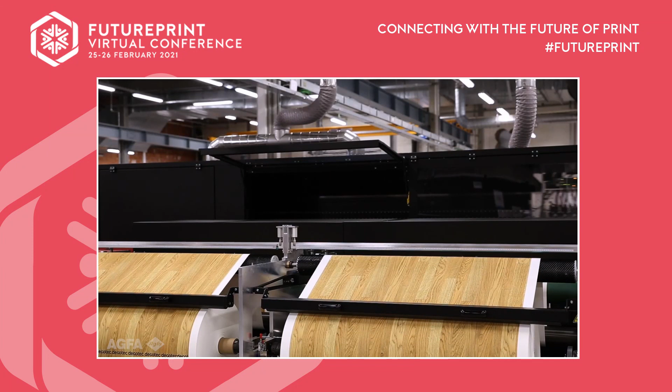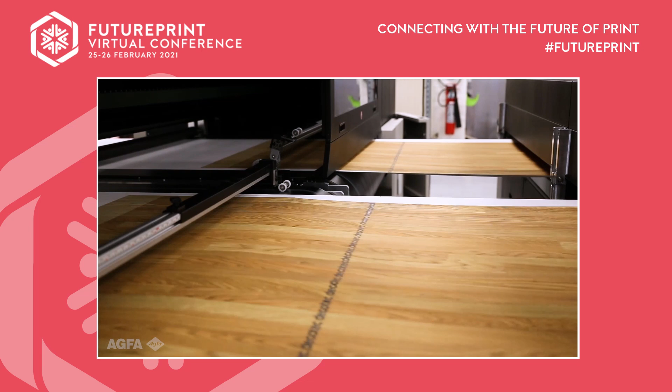Gravure printing has been the standard printing technology with proven quality for decades. This technology was developed to print high to very high run lengths. It uses engraved cylinders as print masters, which are specific to each design. Its color inks are formulated in-house in view of specific designs. It takes time to reach the exact same color each time, and the storage of the cylinders takes up a lot of space. Inkjet printing starts directly from the design file and does not need a print master. It also uses a fixed set of process colors. The design is printed by jetting the ink droplets exactly onto each spot to reach the desired color. This results in many advantages. 1. Inkjet can be used to print very short to long run lengths, and repeat jobs become easy. 2. Inkjet can be used during all stages, from the design over test printing and proofing to real production. 3. The design freedom is huge.

Specials such as company logos, pictures, one-off designs, and much more become easy and economical. Printing of different consecutive designs without stopping, or with a very short changeover time, becomes realistic.

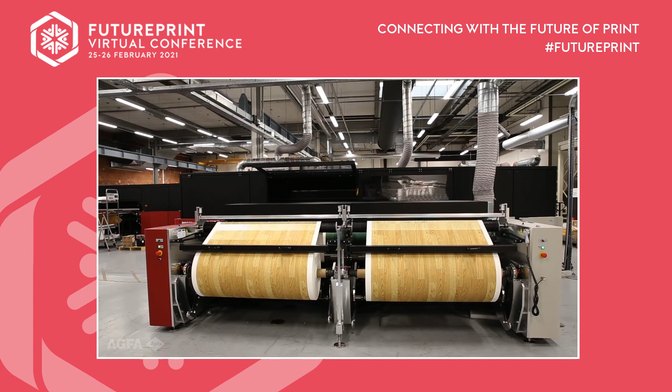As a result, inkjet printing provides an answer to two key market trends. First, a very short make-ready time, which also allows for lower stock at every stage: the deco printer, laminate producer, the dealer, the do-it-yourself shop. Second, laminate applications have become a fashion item. While once the number of designs was limited, the offering now covers a broad selection of designs with new trends every year. In addition, there is a tendency towards personalization. Inkjet is best placed to match these demands.

Really good. Kind of sums it up quite easily, doesn't it? Just gives us a little bit of a frame there. I mean, just a question for you.

Why now, and how's that market going to evolve, do you think? The why now question is indeed why not earlier, why not later. I feel that there is now the perfect match between the market demand, the market pull, and the technology push. Inkjet is ready for this application, and the customers, the end users, the deco printers and laminate producers, are convinced of this. So that's why now.

Which companies are mostly interested? This is not for newcomers. Mostly the existing companies that are in this market, and they feel the need, especially because of the freedom of design choice, the cost of introducing a new design, the end of life period of a design, which is very expensive with gravure print, cheaper with inkjet. So there are a lot of reasons that those companies active in the market understand very well. So they are the first ones to look to the digital technology.

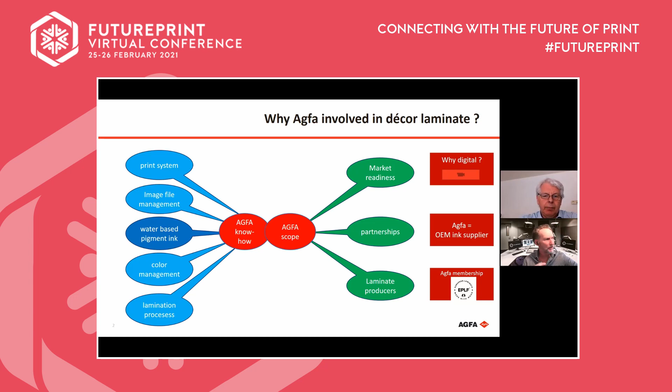And do you sense, Mark, that it's fairly easy for customers to make money quickly with this? But it depends a bit on what you want to do with it. For who is digital best suited? What run length do you have for the application, the furniture market, or your market? It all depends on what you want to do. Run lengths are very different.

I try to give a very generalistic, schematic view. Don't look too much to the exact numbers, it gives you a trend. The end user or laminate producer's job is creating until full production or large production, how much paper that uses and which print system he can use. Basically, only the very high runners, maybe only 5% of the designs today, are really high runners that run for a few days of gravure printing without stopping. So it's not going to change that part. That's the real large volume production that will stay gravure, to my belief. But all the rest will be inkjet, of course.

And what has already been inkjet for over 10 years is the design stage on what I call a plotter. It's a very cheap, wide-format multi-pass plotter, not too wide, that needs only to print a maximum of 10 square meters. If it takes 1 or 2 hours, people do not care, but they use it in proofing and design. Once they know they want to test this design, they need a run to test it on the market. Then it goes to a smaller volume, maybe higher volume, comes back to smaller volume. You have this trend in the life cycle. So a high-speed multi-pass printer is enough to cover that area of tons of paper printed, while at some point you really need a high-speed single pass. Of course, there is an overlap too.

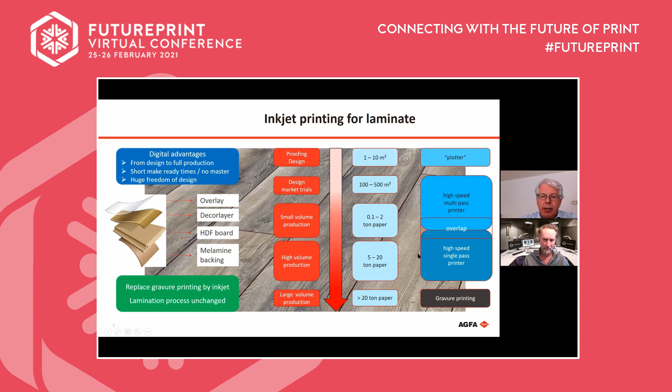The next thing, if okay for you, Fraser, I'd like to focus a bit on the high-speed multipass, because maybe it's not clear enough to everybody what I mean by that. I can only do better by showing the AGFA development launched last year, the InterioJet, only targeting this market. That'd be good to see.

It's a dedicated machine with a dedicated ink set, water-based, of course, because you print on paper. It's also an untypical ink set - it comprises a red and a yellow ink to make the brown colors of wood designs. It's a fully AGFA development - the ink, the software, the printer, everything is AGFA made.

The dual lane is very specific because this is targeting the smaller widths, maximum width 55. But you can run a design on one lane and trial while you print production on the other, so it gives you a lot of flexibility.

And it's multi-pass, so scanning heads - 60 scanning heads, but up to 340 square meters per hour. So multi-pass high speed, in my definition, is 250 and higher. And this fits for the investment in output that I need.

But do not be mistaken, this is not for personalization only or fashion. We have customers doing unattended 3-shift printing - so production, basically. That's really good - that's in an intermediate phase where you start to learn with inkjet, and you have the need but not always the volume for each production run, and then this is a perfect solution.

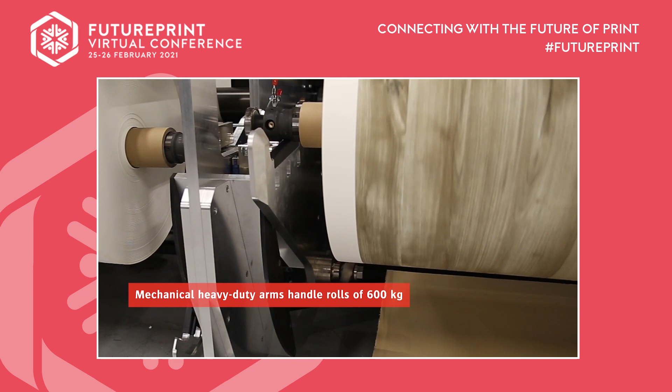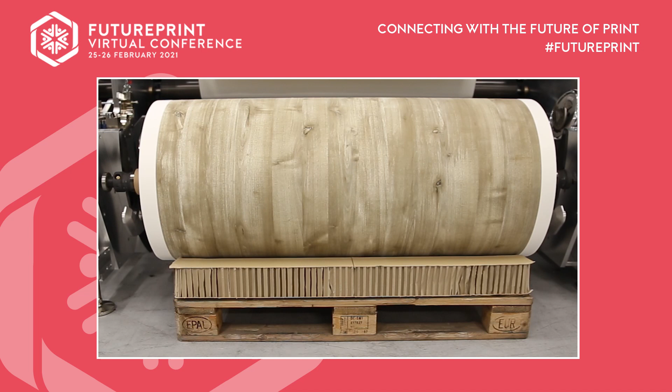Very impressive, really impressive. And I guess in the development of the technology, one of the things you talk a lot about is your kind of partner relationships. Is this one of those pieces of technology?

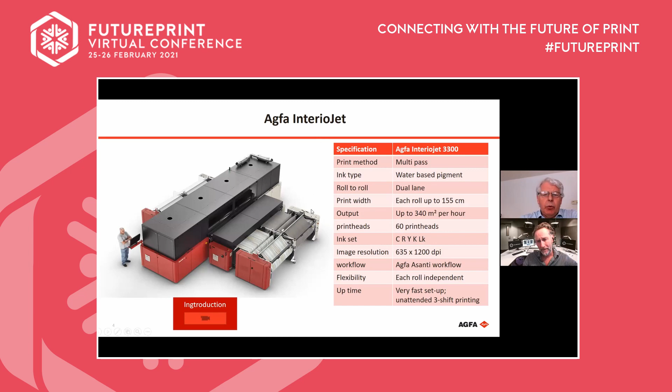In the InterioJet case, it's really AGFA technology for everything - printheads, all of it. The case of partnership is more in the area of high-speed single pass. The reason is simple - you cannot do everything yourself, and it takes a lot of skill to engineer such a high-speed single system. Especially in the laminate market up to 2.25 meters print width, we're not talking about 60 heads, we're talking about hundreds of heads.

There's also the handling of the rolls, and typically there's a primer solution in line in such a printer. So it becomes something for expert companies active, let's say, from Gravure or from Flexo, bringing such high investment systems - and the output is extremely high. So it's another range of printer.

Again, they need a tuned ink. Here it's extremely important - what we did is work with every party involved. From the ink side, it's much more than the ink itself; it also comprises the integration of ink with the processes of laminate production. Because the target is that the ink does not need any change in the later steps, meaning the impregnation and the top coats on top should not be changed versus gravure. So it's a drop-in inkjet solution, and the only way to be sure of that is to work together with the laminate producer.

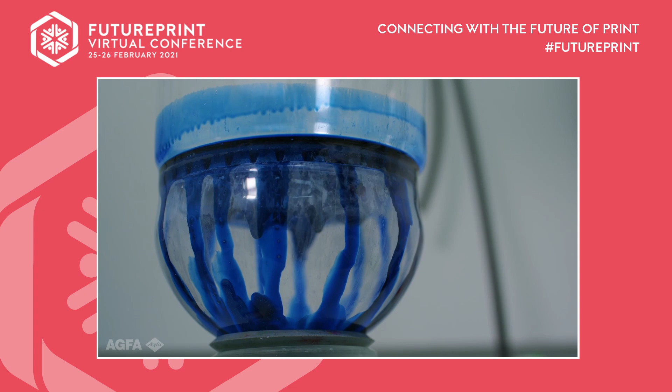For the specific case of ink development for printing on decor paper for laminate products, AGFA has set up a partnership with Unilin. Through this cooperation, AGFA was able to develop the full ink performance in relation to the laminate quality. The ink formulation was adapted in view of the lamination process demands, and important features such as image quality, primer ink combination, metamerism, and color constancy were extensively checked.

Nevertheless, it remains of key importance that the ink is designed in view of the specific inkjet printing equipment, especially the printheads and the drying system. AGFA has been active as OEM ink supplier for UV inkjetting for over 10 years and has gradually built up a reputation as a reliable ink partner, not only because of the ink performance itself, but also thanks to our commitment and our flexibility to tune inks to the full solution.

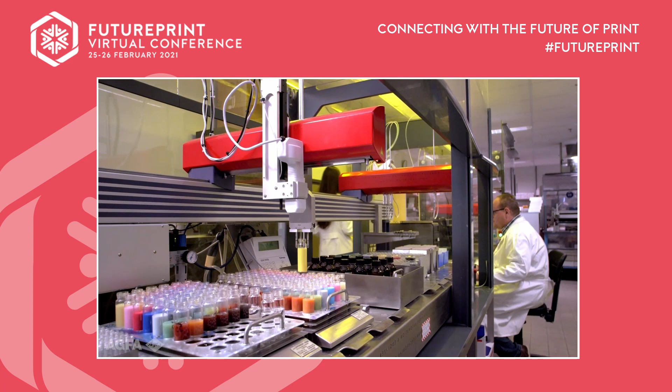We are also doing this for water-based pigment inks. We develop and test ink prototypes in-house, but the final ink tuning is done in partnership with the OEM. This is the only way to guarantee consistent print results. In the field of printing on decor paper, we have worked with many different OEMs. The development of a high-speed, single-pass print system requires a lot of engineering skills. The combination with AGFA's ink chemistry and ink system know-how is the ideal fit. This has resulted in high-speed, single-pass print solutions specifically for this industry.

So that's really good. So you've got a couple of options: a multi-pass option, and single-pass partnerships with companies that develop very specifically single-pass technology, and you've worked closely with them to deliver the perfect ink. So that's very, very effective.

That's correct. And actually in the video, I named the validator of the laminate where we had a long-term partnership, which I will also come back to later, that it also extended into a broader field. And in single-pass press, one press is of course the Rotajet from Koenig & Bauer, which uses AGFA ink and is in use at the decor printer for laminate production. So that's an example. But as said, we are not exclusive.

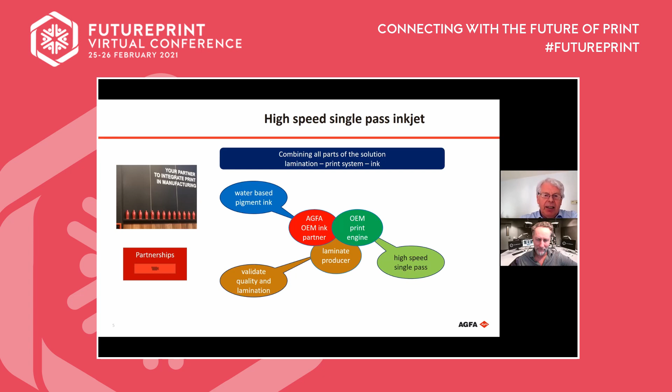And of course, if okay for you, I want to come to my typical topic now, which is inks, the technology of ink.

Since this is one of the key elements, of course, it's so important to get the ink right. Not only the ink itself, but especially the ink working with the system, with the printhead, with the printing solution. Also the unit—if your ink doesn't dry in time, you also have an issue. So the ink supply, all the aspects play a role, the interaction of ink with everything.

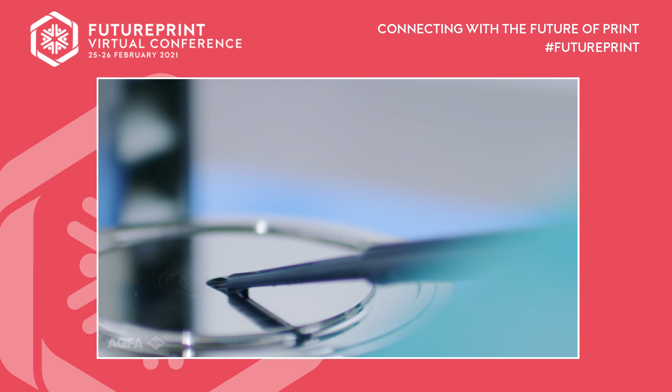Pigments for laminate applications are selected based on the following criteria: 1. Reproduction of wood colors. 2. Low metamerism. 3. High level of color constancy. And 4. Good light fastness.

Therefore, the ink set comprises cyan, red, yellow, and black inks containing selected inkjet grade quality pigments that match the pigments used in gravure printing. Together with fine-tuning of pigment concentration, this results in a color gamut that covers all wood designs.

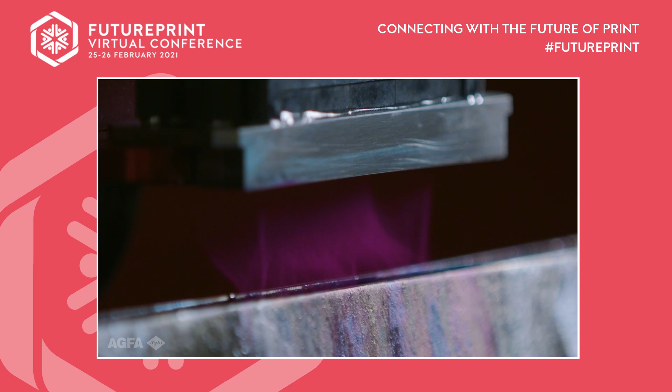The ink formulations are perfected for excellent jetting reliability and consistent print results. We master this for high-speed printing at full width of the laminate, both multi-pass and single-pass printing. Linear speeds of over 100 meters a minute are reached in single-pass mode.

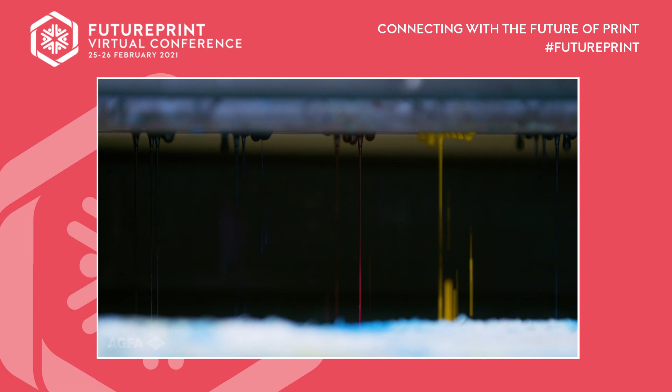The ink development includes extensive drop watcher studies, and ink formulations are adapted according to the jetting results for specific print heads. Jetting reliability implies that all jetted drops are located at their exact targeted spots over the full print width, day after day, batch after batch, design after design.

Excellent. So I just wonder, whilst we watch that, why is it that water-based inks are so important, and how does that fit with the industrial applications we're talking about?

Excellent question. So for the water-based ink set, we have also tried UV ink sets. But the natural fit with paper is of course water. The most important reason is the next processes in the laminate production, the impregnation step—it's much easier with a water-based ink. Also, the water-based ink allows printing a design with low consumption, meaning a design with light colors up to a very dark oak or something. So the full range of wood design colors are possible with water-based ink in the impregnation step. That's a key element of why water-based.

Mark, is it as good? Will you get the perfect result from a water-based ink? In this case, definitely—water-based is for many things the best choice, not only for color, but also for sustainability aspects and cost.

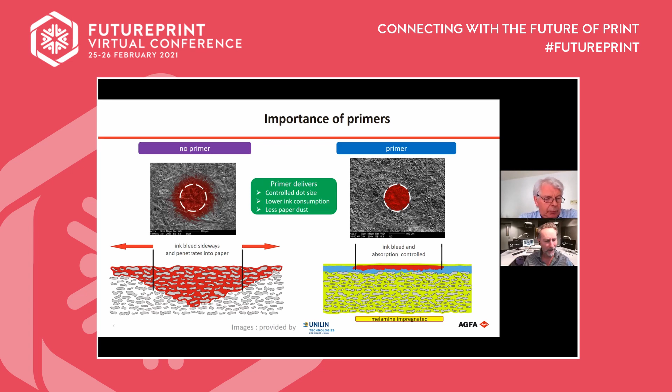As we come to the last couple of minutes, it's been a really informative session. What kind of conclusions do you want to draw? Oh right, there we go. Fantastic, you're already there.

I prepared a bit for you, because I try to show you the reason why AGFA is involved, that it's a match with our scope. Very important here is that it's not only a technology push, the market really needs it. There is a driver from the market, and that matches the technology capabilities. AGFA is a key player here.

In the solution approach I've shown you, AGFA can do something on its own in InterioJet, but we're also very capable of being in a partnership. Last but not least, we have learned with laminate producers that it really is a solution that they want, that they really need. That brings money for them.

So in that way, the summary words are: it's economic, the full life cycle of a design from start to end, the huge freedom of design choices. Print quality, of course, is a must, but much more, the laminate quality, the end quality, is proven. That's the summary of the talk today.

I think actually, Mark, to be honest with you, you're being quite modest in what you're saying. I think you could also say that behind all of this is a lot of thought, and AGFA as an organization takes time, care, spends money and resources to get things right. The choice of a piece of technology that AGFA developed, or an ink developed by AGFA in partnership with people who really understand the market, shows that you've really thought this through, and as a partner, AGFA would be a good company to work with.